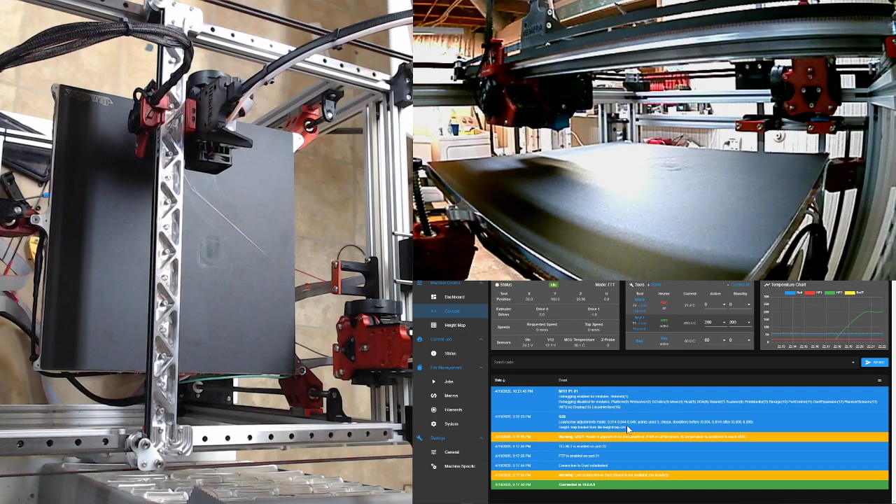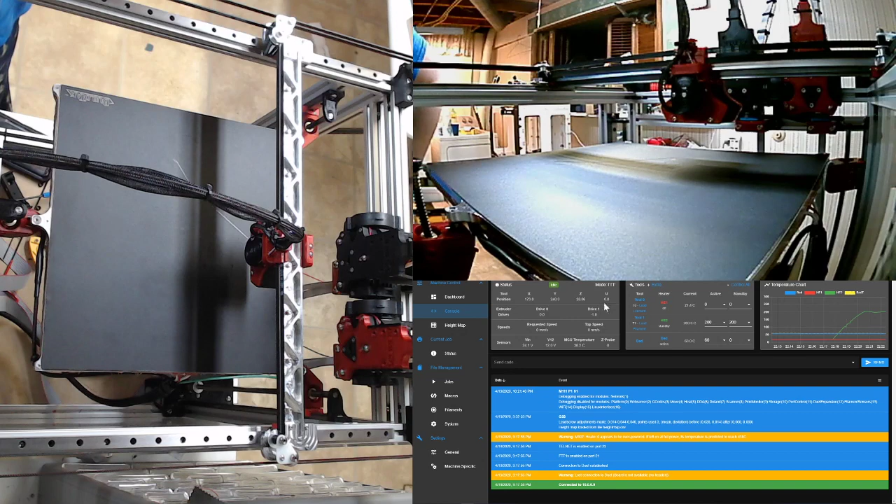Okay, so the first thing I'm going to try is I'm just going to manhandle the wiring around a little bit and see if I can get it to fault out. Nothing too crazy because I don't want to actually break it when it's not broken.

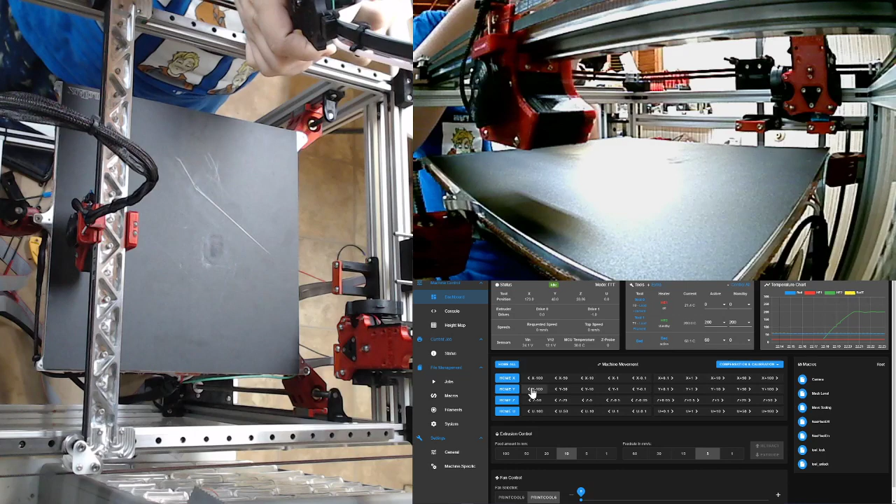So wiggling wires, nothing seems to be an issue here.

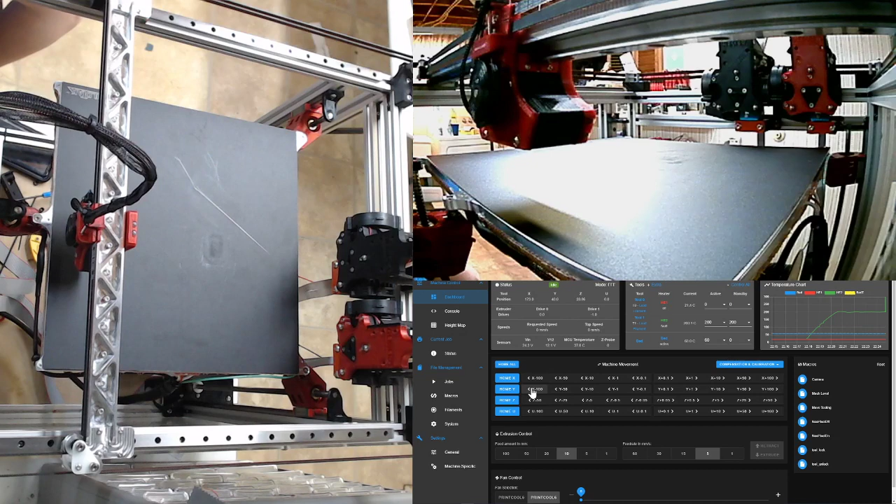Now let's deliberately pull the temperature. There we go, we have a fault. And no messages.

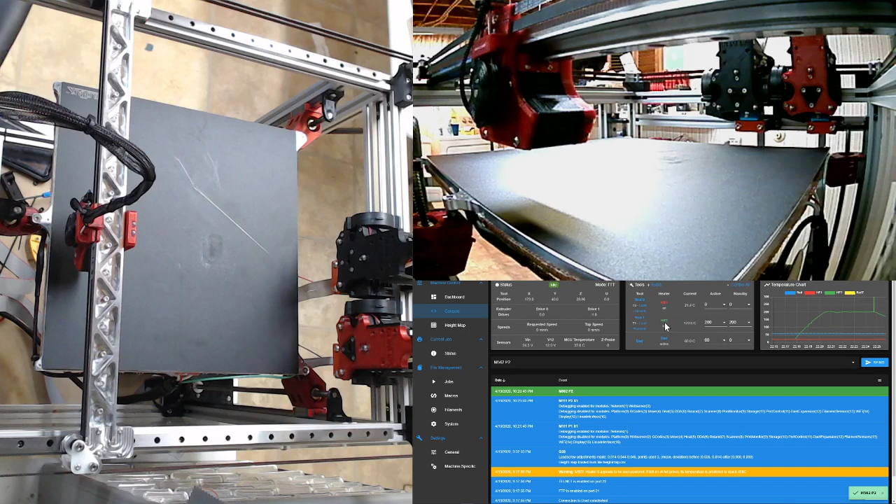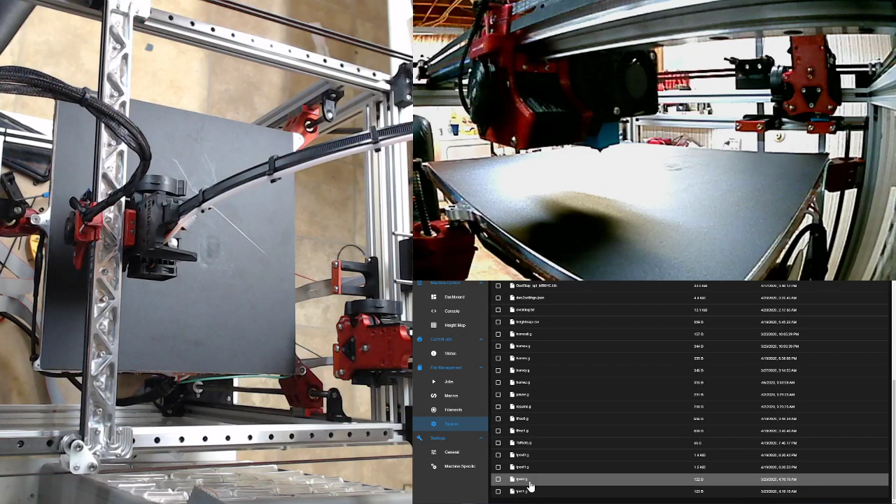Yeah, just unplugged it and plugged it back in really quickly. Nothing.

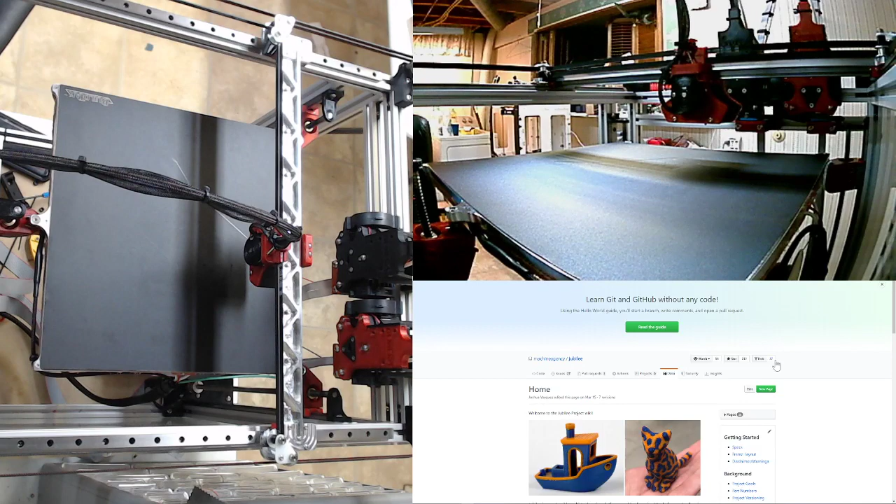Let's try to run an auto tune here. Now, it didn't work the last time I tried to run an auto tune, but that was before I upgraded, so let's see if maybe something got fixed. To do that, there are some instructions in the Jubilee wiki, and I'm sure there's other places, but I've got to find it really quickly through the wiki.

Surprised Brian isn't back yet.

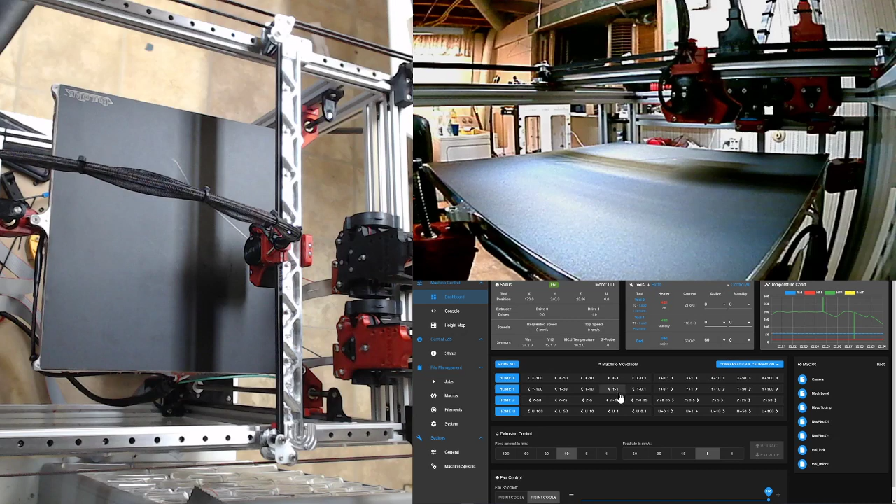Extruder tuning. So we'll do under 1.

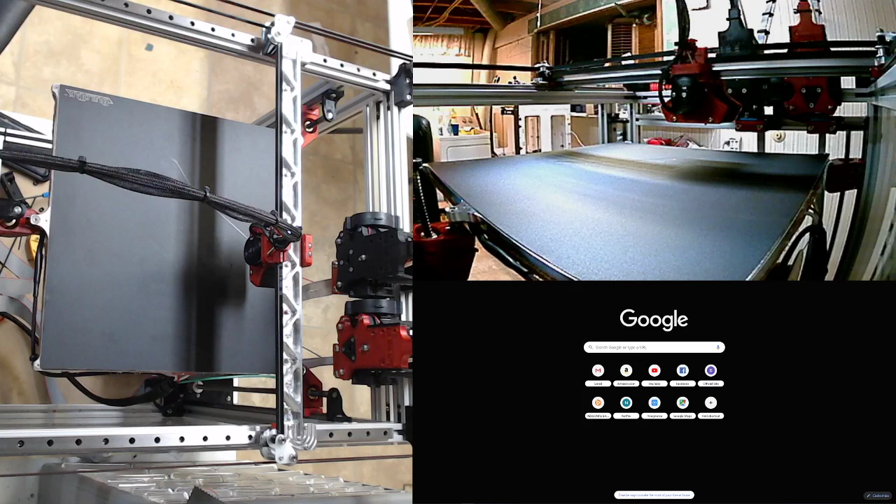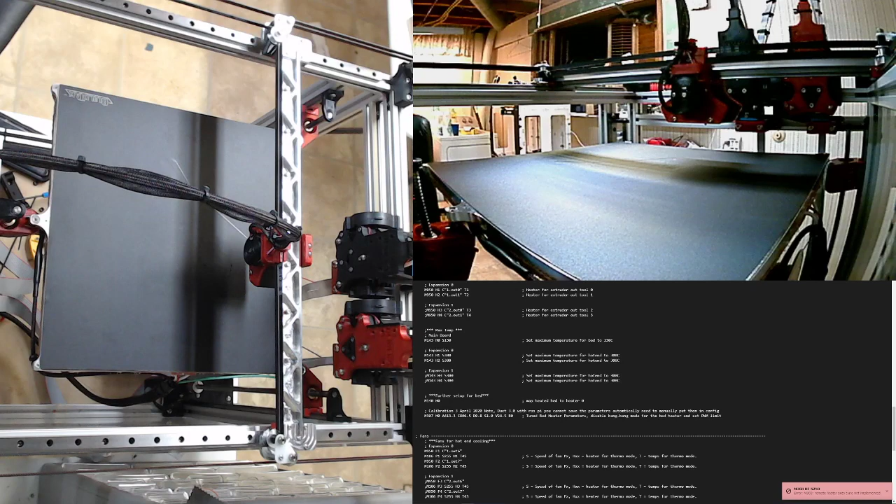Remote heater auto tune not implemented. So what I'm wondering is if I had a fault due to tuning. I don't think I have any tuning set.

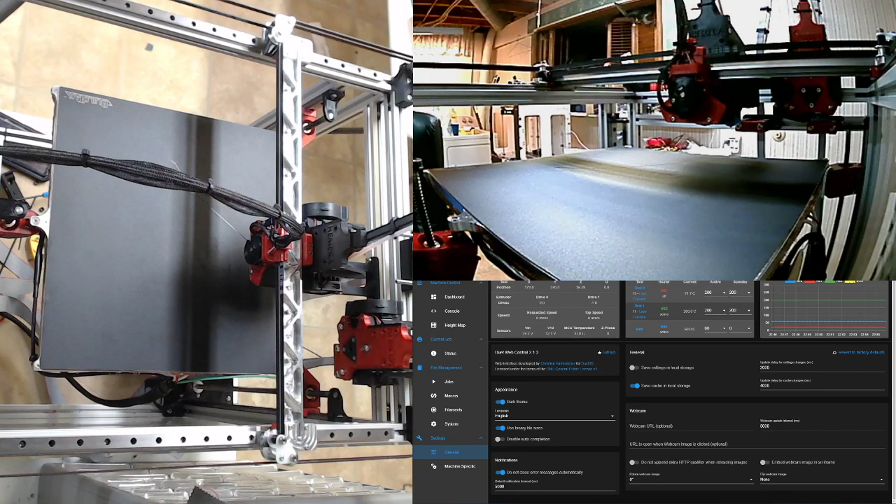To the frame rather than through the motor. And then, so what we're doing with that is we're taking all that load off of the motor shaft, and the coupling is allowed to basically free float the way it's supposed to.

Makes a lot of sense. Yeah.

The other thing is we identified that if you're not using the specific steppers for the Z's, a lot of the other stepper motors out there have a 25 millimeter shaft, or 25 millimeters long, instead of 22. And Josh's design and the coupling drives the shaft a lot farther into the coupling than is designed for that coupling.

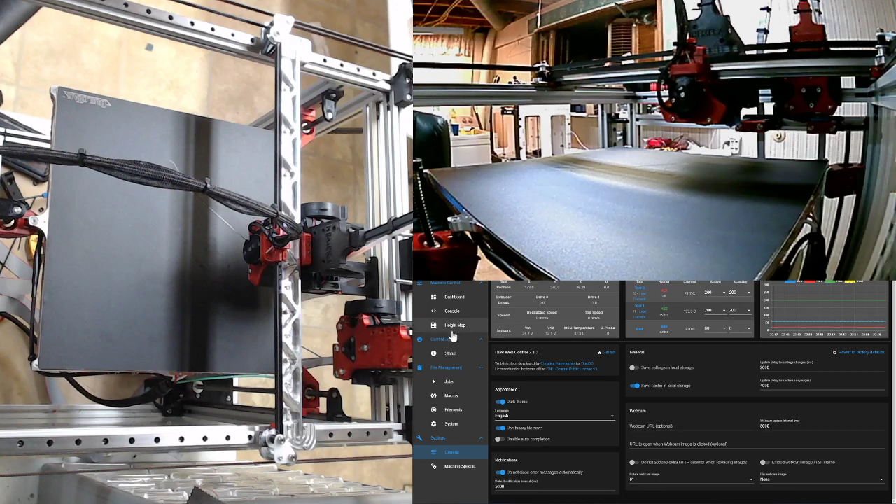So what you end up doing is compressing the coupling. The shafts are in direct contact with the polymer spider that's in the middle of it, so you're not getting that flex like you're supposed to. Right, and with the longer shaft motor, and if your motor body's a little longer, what happens is your motor is too close to the ground or too close to the table.

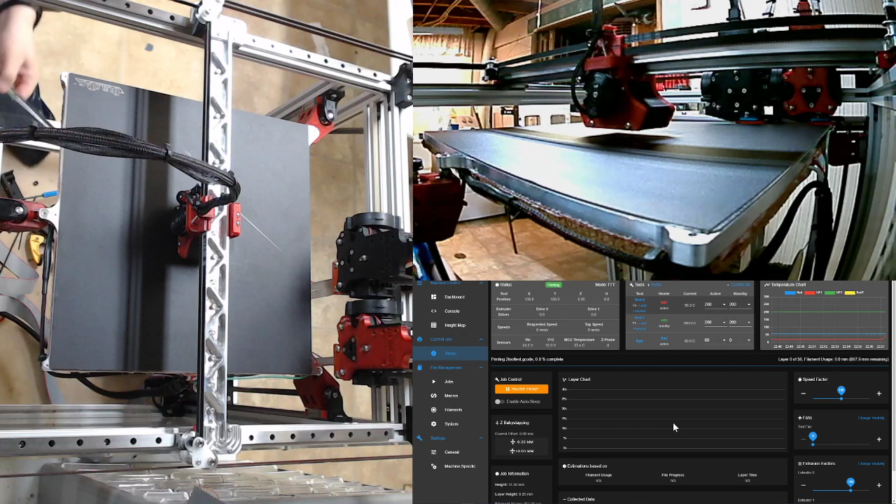Makes sense. I've been wondering about doing subtractive building with it. Well, that's actually something.

Oh, that's actually in the works. It's a tool. So there's a model, we're actually, it's prototyped. We're not actually anywhere near release on it. But Josh is working on a spindle that goes into a tool position.

Cool. And the spindle, the motor is actually off, it's using a flexible shaft for the spindle. So it's a lightweight spindle that couples a Dremel, and then design, or yep, essentially you're essentially clamping a Dremel to it. Yep, makes sense, I've seen this before, and that works.

But yeah, it also adds with the Z-force, right? Because those tools will press down on it, and that adds more. I mean, it's like having an additional weight on it. Yep.

1 day, 1 hour, and 4 minutes. That's a long print.

Yeah, the feet are 60 millimeters tall, or the modified feet that I've made in order to get mine to fit. Right.

Looks like Eric is back. Yeah, how's it going? Yeah. He is, but he's muted. Yes, I'm back.

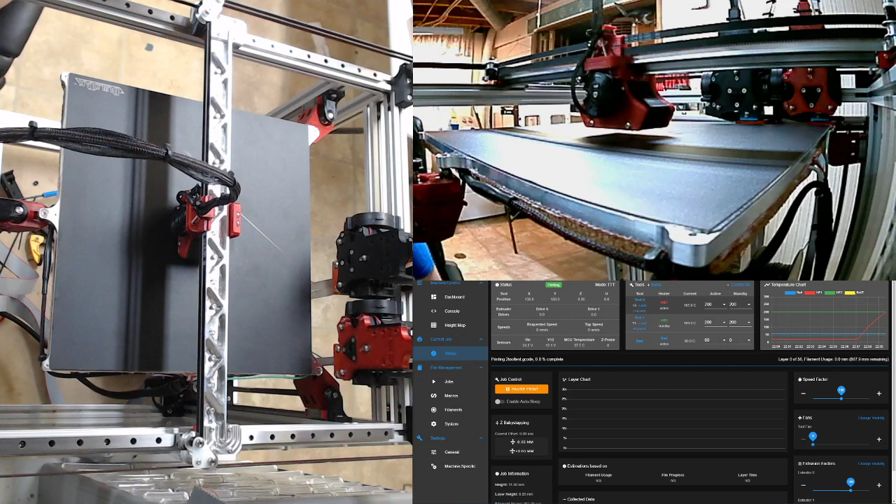What are the issues you run into in it? It's not really an issue. It's just today's been a long day, and I ended up doing a lot of yard work, so I'm just kind of done.

So I don't know what my issue has been, but I keep having the heater fault. I heated it up and moved the wires all over the place to try to make sure there wasn't something loose.

I checked every single step, wiggled it all around, no heater faults. But here's the weird thing: I can unplug it and plug it back in, and I'll see a spike in the temperature chart when I do that, but no fault messages actually get generated anywhere. I've tried running the commands to turn on messaging. I'm wondering if it just doesn't work for the expansion boards at the moment.

I tried to run, what was it, M303 or whatever the auto-tune command is, and apparently RC8 has a message for it now. It just says that auto-tune is not supported on remote boards or something to that effect. Back in 3.0, it didn't have any message whatsoever, it just didn't do anything. So at least it has a message now.

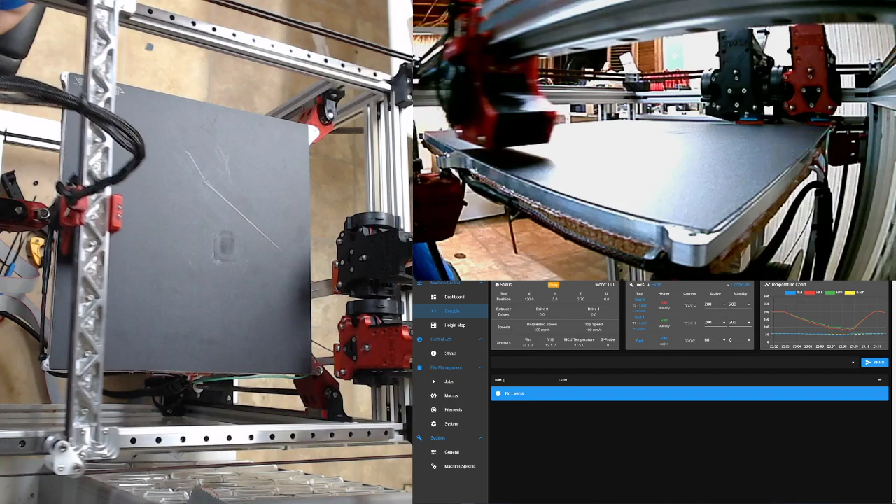So someone mentioned using the Klipper firmware on here for the A8. Yeah. So have you ever done anything with Klipper before? Nope, I was just reading the docs. Okay, it's not as hard as it looks. It is pretty well documented, and the community is pretty solid.

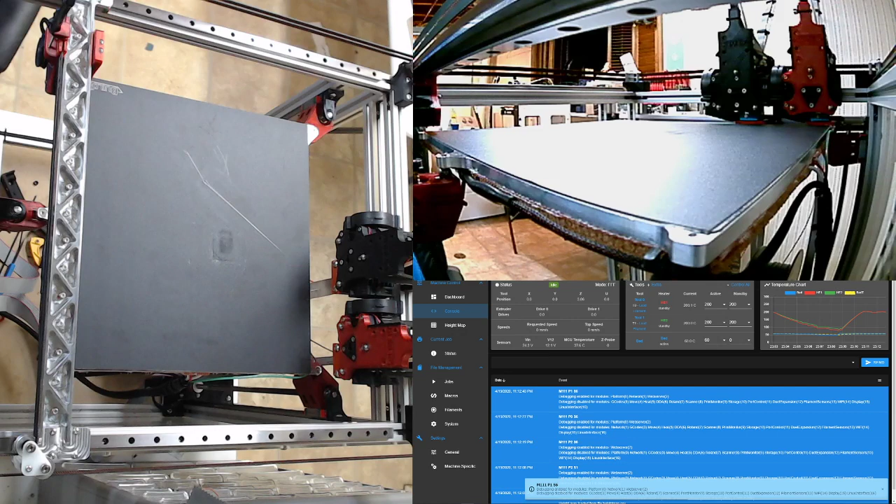I've got multiple machines running Klipper, and I actually kind of like the way Klipper runs as far as the configuration goes - no recompiles or anything like that. You just update the configuration file, restart the host and the firmware, and you're ready to go. And the host is an app, or a service running on the Raspberry Pi. Right.

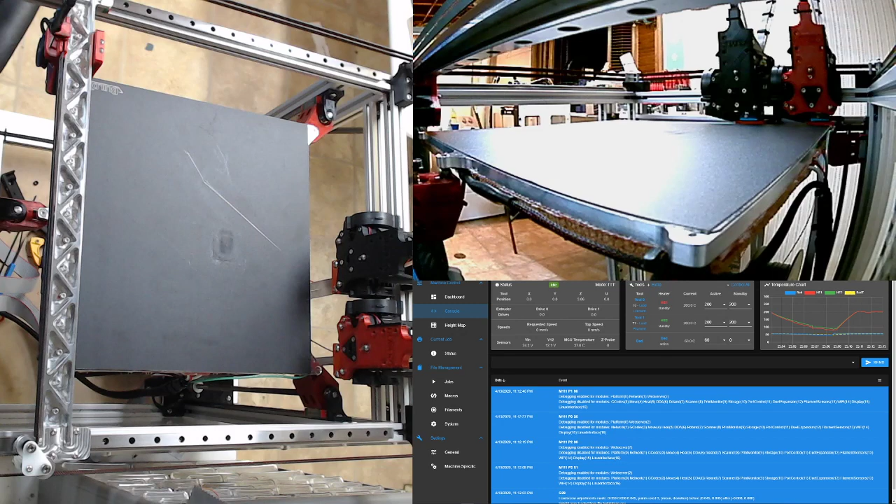The machine definitions - there's a lot of configurations that people have already figured out for you, so you can use those as a starting point. It's got a lot of good conditionals in it, so you can actually do some conditional G-code. You can do a lot of macros, so you can create a lot of G-code macros that can be called from a single G-code statement, or you can even use command line stuff from the terminal. So it works pretty well.

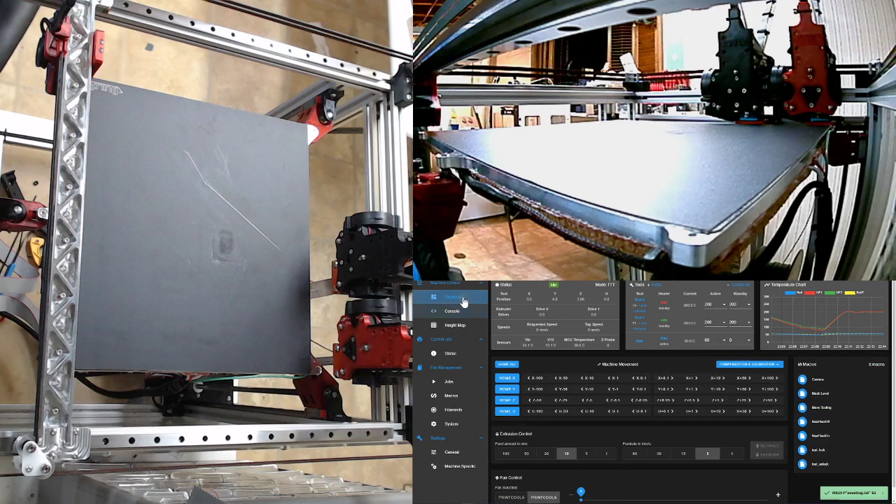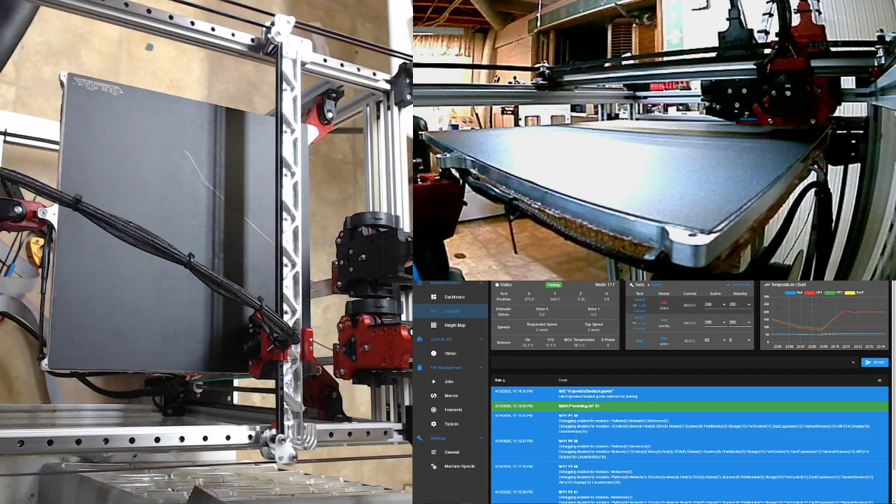Yeah, I'm kind of surprised because until I joined this Discord, I've never even heard of it. Oh yeah, I've been reading about different firmwares just out of curiosity. So I came across a smoothie board and their firmware and whatnot, but everybody's Marlin or Marlin derivatives. So, Klipper offloads a lot of the planning, or the planner and the kinematics, to the Raspberry Pi.

Right. Awesome, GPL v3. Does Jubilee run in Klipper? We actually have a couple of folks who are working on it, and they're planning on using SKR boards because you need 6 steppers - 6 independent steppers just for the main kinematics, just for the motion system.

And then you need other stepper controllers for the different tools. But Klipper doesn't care how many MCU microcontroller units you're running against it. So you can talk to multiple of these SKR boards, or whatever low-cost board you want to use, right? And Klipper doesn't care, as long as you've defined each of the steppers and everything in the Klipper configuration, it will manage them all.

So you could use, say, a couple of SKR 1.4 Turbos - well, they each manage 4 or 5, they each have 5 stepper drivers on them, right? So you've got 10 right there, all of which would run a 4-tool Jubilee. And so you've got about $60 in boards. You throw a Raspberry Pi 4 in there with 4 gig of RAM, that's another $60, and you should be in pretty good shape.

You could drive all of those with 2209s if you wanted to. That's actually just one of the things I just ordered was the SKR 1.4 Pro with 5 2209 boards. Yeah, I did too, I'm upgrading my CR10S. I've got a CR10S with the original board on it, and it's just as loud as anything, so I'm using the SKR Mini E3 for the Ender 5s, Ender 3s. I've got a Marlin firmware that I've tweaked to the point where it's just: here's the board, flash the firmware on it.

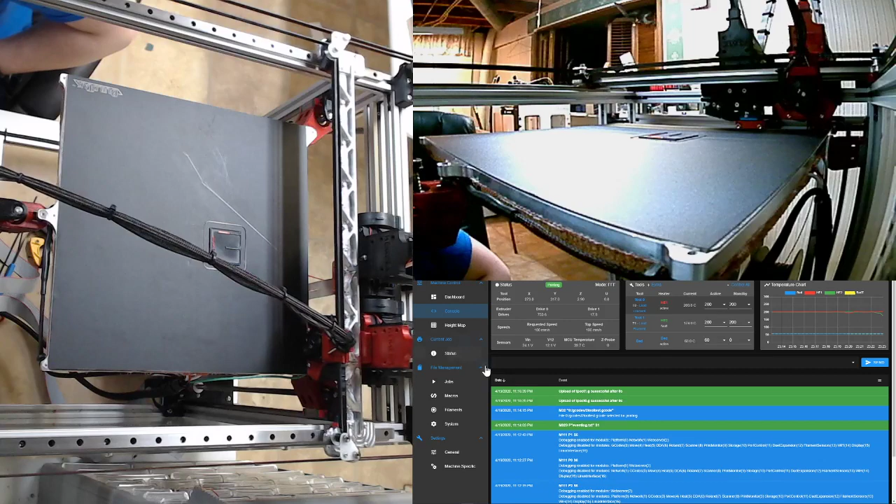And there we go, Heater 2 is faulted. Really? It seems like it happens when it goes to drop the tool off. Oh, here you go buddy. That's weird.

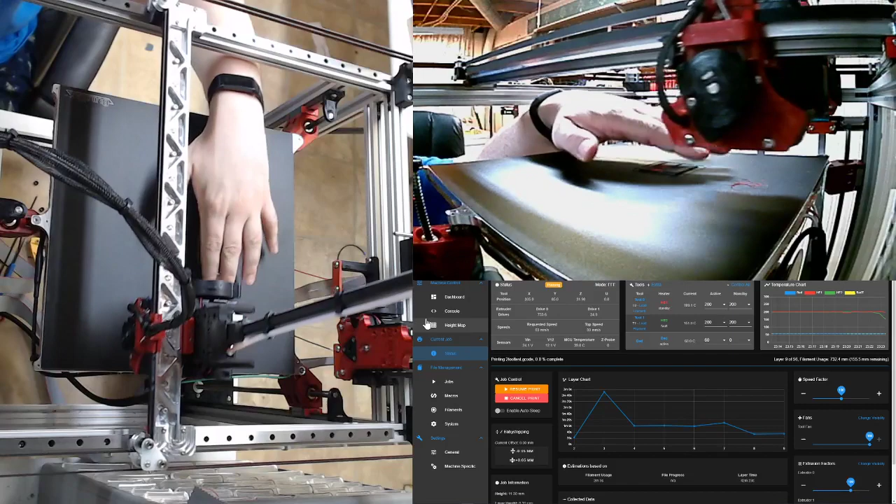It's like I need to add the heater reset fault code to the tool change command. That's kind of weird. The other thing is, it doesn't seem to really wait for it to heat up. Like after it gets to heat the first time, then it goes to switch tools, it'll just pick it up regardless of whatever temperature it's at. Like if the heater's faulted, it doesn't care, it still tries to print.

It's really weird - the heater faulting does not interrupt the print process. I would think it would just by default. Maybe there's something I have to enable in the GCode to stop it, but what was that command number? 553 or something like that?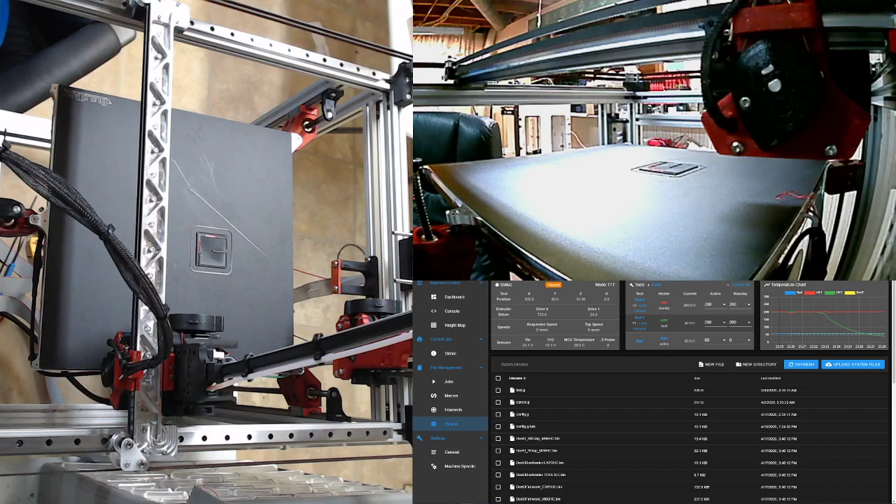Is the heater changing the variation, or are you seeing anything in the chart before the heater faults? I don't see jack diddly squat anywhere when the heater faults - all of a sudden it just says fault on the screen. It's really frustrating, and I've tried enabling logging and all sorts of stuff, and nothing seems to actually enable. I don't know if it's a Duet thing, a Duet 3 thing. But I've looked up logging G-code to enable logging, and it doesn't seem to do anything.

Oh my, somebody's awake. Yeah, I thought I heard something from upstairs, so I just turned the camera on. I don't know why he won't fall asleep.

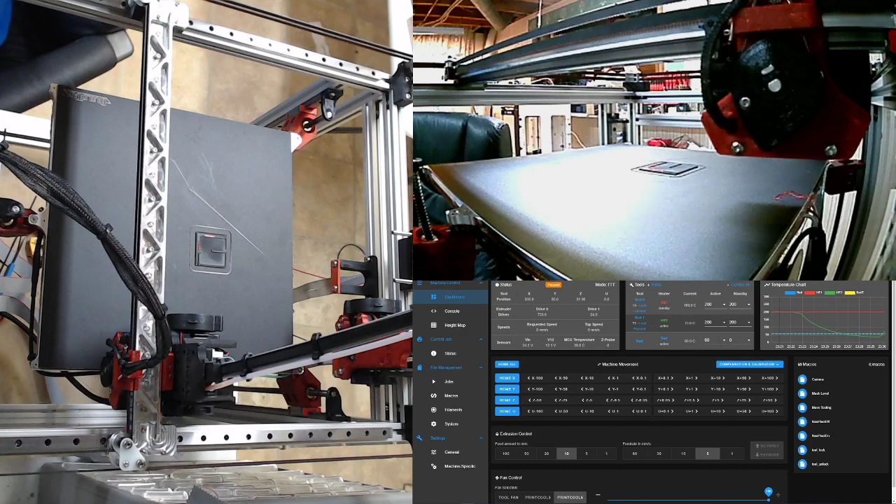There's a default that the heater has to be faulted for 10 minutes before it will fault the print. 10 minutes or 10 seconds? 10 minutes. Really? No wonder - but it should pause the printer, you'd think. But it doesn't, it just keeps printing and printing until you've ended up with an issue.

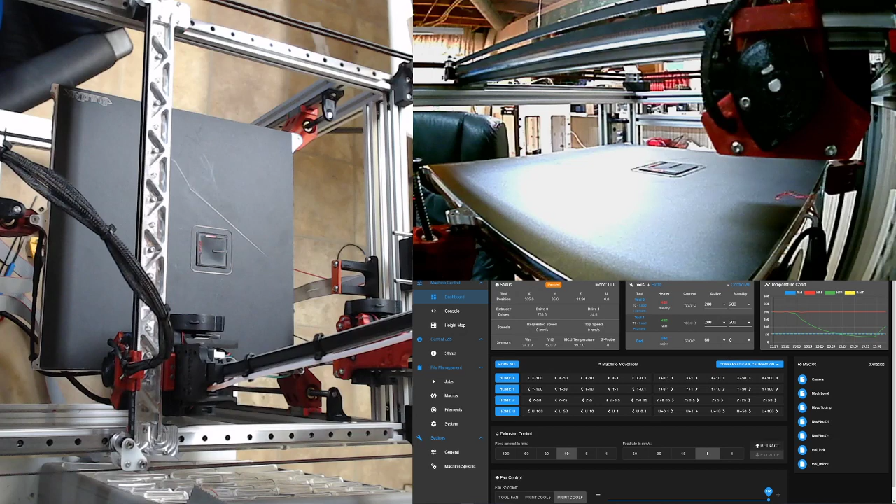So, what the heck? It says the heater's faulted again.